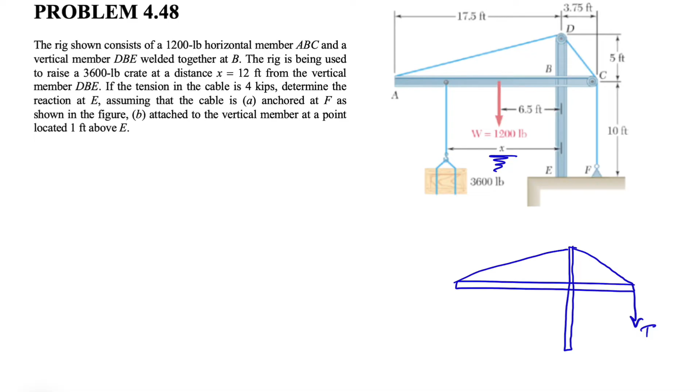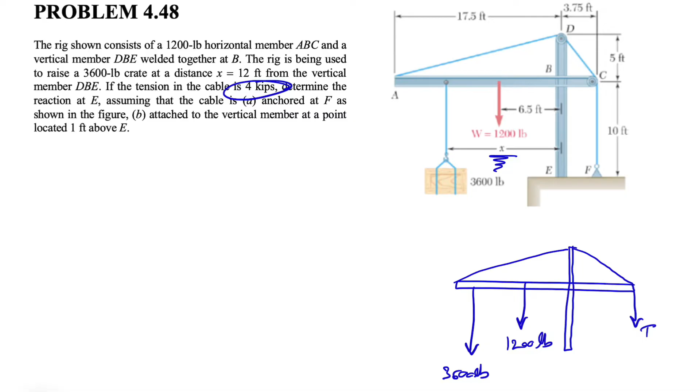So we're gonna do the free body diagram. We have the horizontal member and the vertical, and this will be our vertical member. So we have the tension T in here, which from the question we know is 4 kips. We have the weight of the horizontal, 1200 pounds. We have the weight of the crate, which we know is 3600 pounds. And at E we have a fixed support, which means we have Ex, Ey, and since it's a fixed support, we have to consider the moment at point E too. And that's pretty much all the forces for the free body diagram.

We're going to use our equilibrium equations. Sum of all forces equals 0, and same for the moment. So we can start with our Fx and Fy. If we do the Fx, and this is our positive direction, we only have Ex. There's nothing else. That means Ex is 0. And let's do the Fy. This is the positive direction.

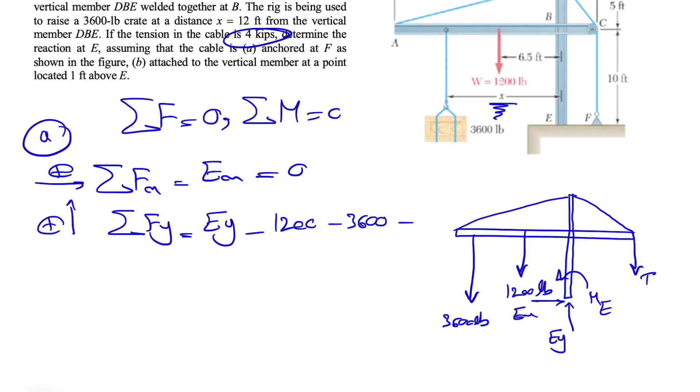So we have Ey minus 1200 minus 3600 minus T, and we know our T is 4 kips, and if we want to convert kips to pounds, we know that 1 kip is equal to 1,000 pounds. So if we have 4 kips, we'll simply have 4,000 pounds. So our T in here will be 4,000, and we can find our Ey, the other reaction at point E, which will be 8,800 pounds.

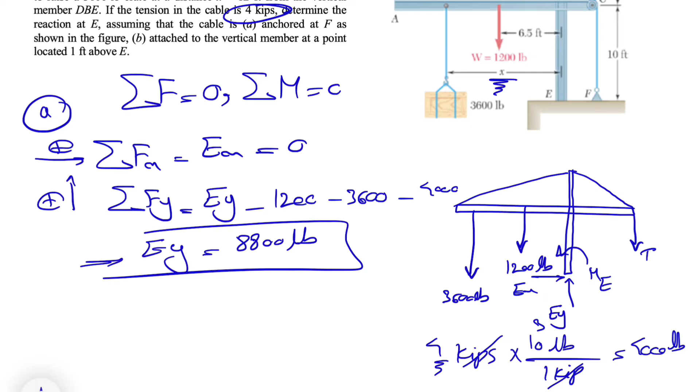The only thing we have to keep in mind is that the unit for the tension in the cable is in kips, and each kip is equal to 1,000 pounds. So if we have 4 kips, we have 4,000 pounds. And last thing, we have to find the moment. Let's go with sum of all moments about point E, counterclockwise positive as always. We have the moment of 3,600 pounds, which is positive since it's counterclockwise, times the distance, which is what we have for x, and we know that x is 12 feet.

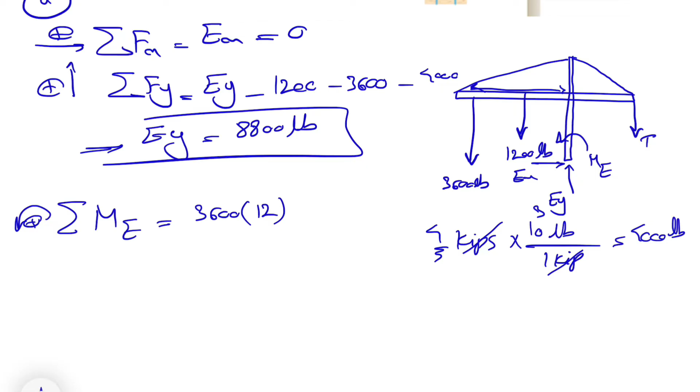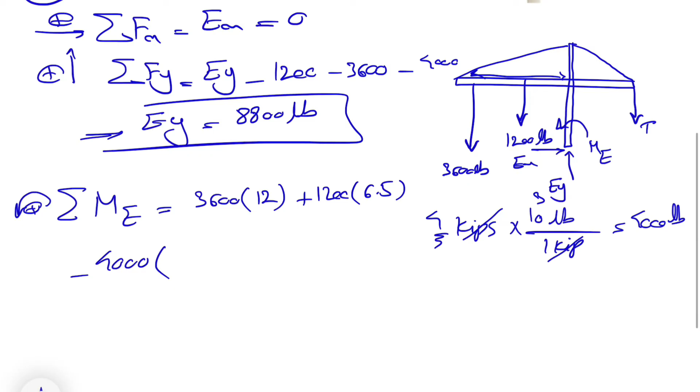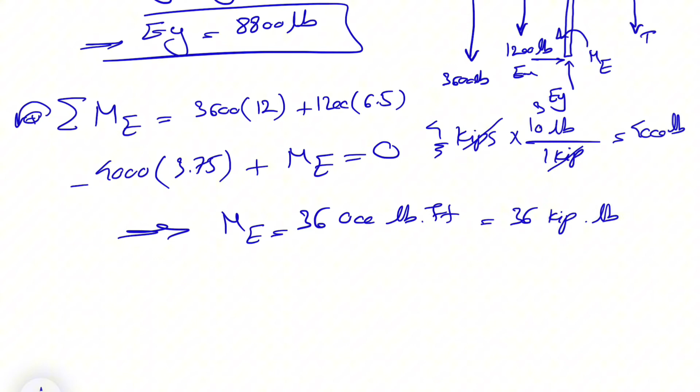We have the moment of 1200, again counterclockwise, positive, and the distance is 6.5, and we have the moment of the tension, which is 4,000 pounds. Since it's clockwise, we have a negative sign, and the distance is 3.75. And we have the moment at point E, and the only unknown is ME, and this would give us a moment of 36,000 pound-feet. If we want to report it in kips, it will be 36, and since it's positive, it will be a counterclockwise moment. So that was the first part of the question.

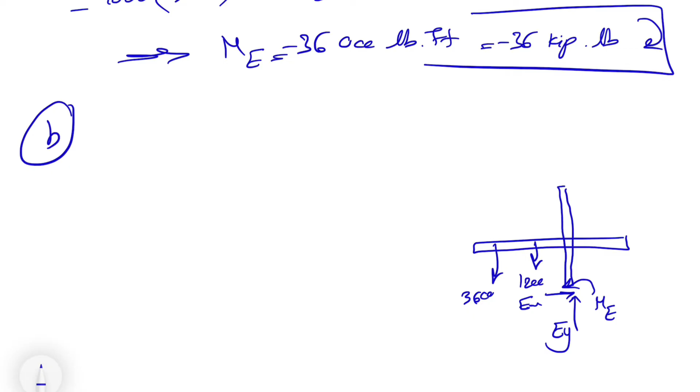In part B, we have a condition where the cable is anchored 1 foot above point E. So we'll have a different free body diagram with these vertical and horizontal members. Again we have the same thing, 1200 in here, 3600 in here. We have Ex and Ey. Let's consider the moment at point E, and the cable this time is attached here, and we have this cable in here and this cable in here.

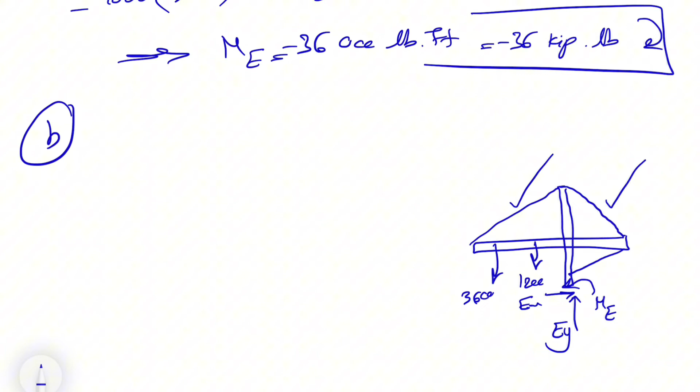Now that the cable is attached to one of the members, we don't need to show any T in the free body diagram, because it's like the other two cables in here and here. We didn't consider any tension for them, and we have one single body where the external forces are only the 3600, 1200, and all the reactions at point E. So we don't need to consider any tension, since it's one single body with only the reaction at E and the two external forces.

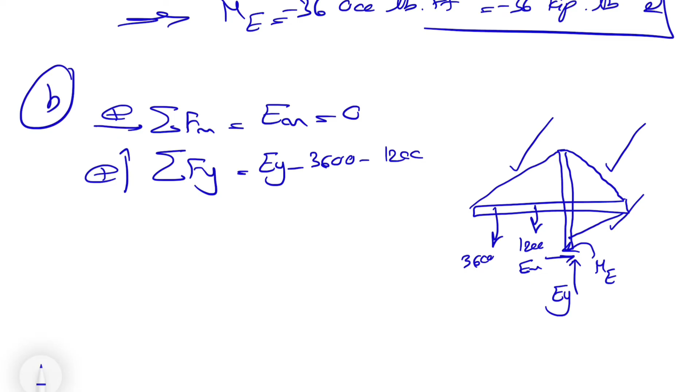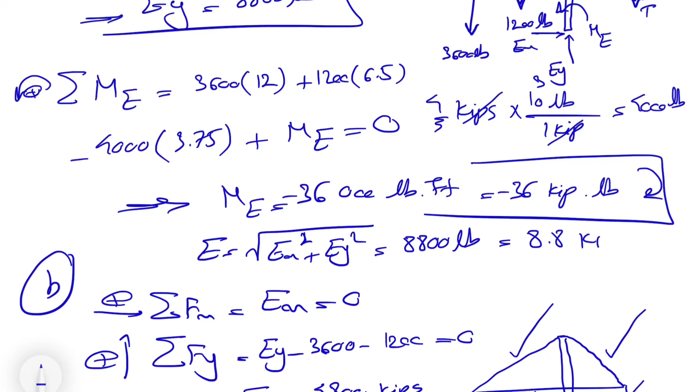So we can start with our equilibrium equations. Fx equals 0, same as the previous one, so Ex will be 0. We'll do Fy, and this time we only have Ey minus 3600 minus 1200 equals 0. Oh, one thing I forgot to do in the previous step: we found Ey and Ex, but we didn't find the magnitude of E, which is the square root of Ex squared plus Ey squared. Since Ex is 0, it will be only Ey, and we found that Ey was 8800 pounds or 8.8 kips, and this was the direction.

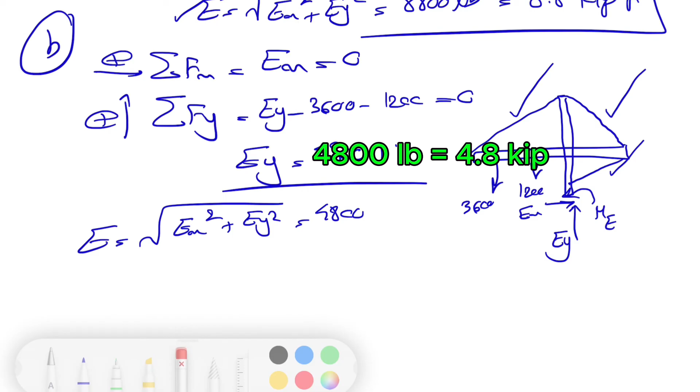So it's always good to report the reaction at the end, the magnitude, by finding the square root of x component squared plus y component squared. So that's what we have for E in part A. Our E in here will be again the square root of Ex squared plus Ey squared, and this will be 4800 pounds, or 4.8 kips.

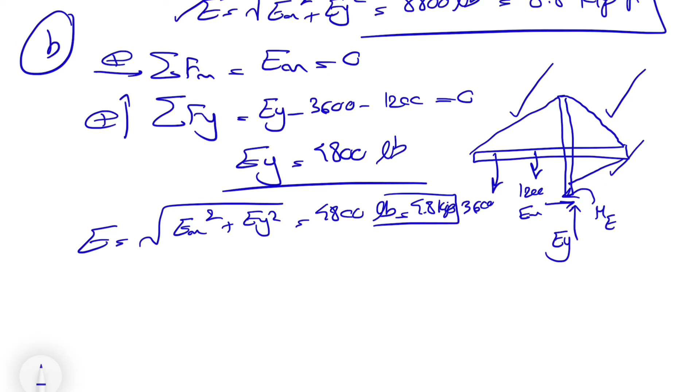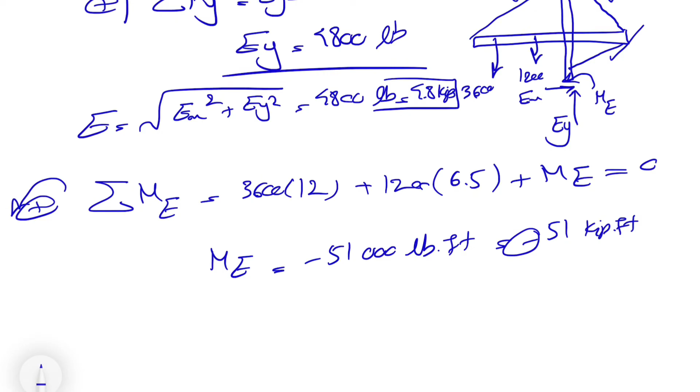Now we can do the moment about point E, counterclockwise positive. We have the moment of 3600, counterclockwise, so positive 3600 times x, which was 12, plus 1200 times its distance, which was 6.5. And there is no tension in this part, as I mentioned, and we only have the moment at E, equals 0. From here we can find the moment: minus 51 kip-feet. The negative sign shows that the moment is clockwise. And this would be the final answer for this question.